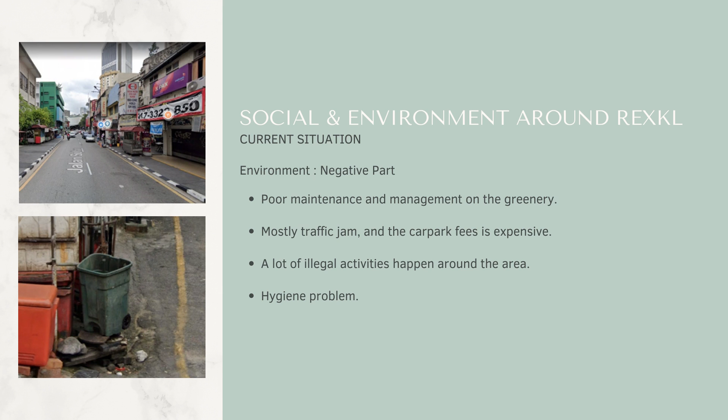Now we'll look at the negative part of the current environment. Around RexKL, the maintenance and management of the greenery is very bad, and the hygiene problem is also very bad. Not only that, the traffic is always jammed, and the car park is very expensive. Other than this, there are a lot of illegal activities happening, for example selling counterfeit goods, vandalism, and others.

So the proposal for the project is to design a pewter museum. The reason behind it is because around the RexKL building, there is a lot of Chinese history related to tin mining. Besides that, there are also some available advantages suitable for a pewter museum. For example, RexKL has a perfect location to attract different kinds of tourists, and around RexKL there are also a lot of cultural or historical buildings that allow tourists to visit.

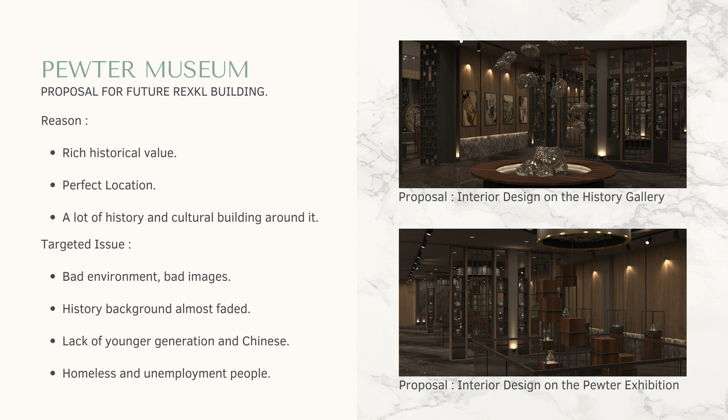Below are the issues that I will be focusing on in this project. So the next part is the chosen client.

The chosen client that I found is Royal Selangor. Royal Selangor is the world's foremost name in quality pewter products and the world's largest pewter factory. It was founded by a Chinese migrant called Yong Koon. Royal Selangor provides a unique hands-on workshop for visitors to experience.

Therefore, this hands-on workshop is a good activity to bring into the pewter museum. Besides that, another reason why I chose Royal Selangor is that it is closely related to pewter and comes with a lot of rich historical value.

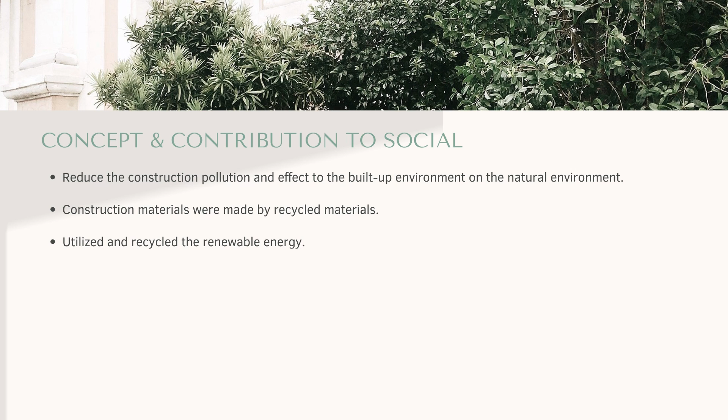It achieved a diamond level under the EEWH, which is the Taiwanese version of LEED. The concept and contribution to society for this building are to reduce construction pollution and its effect on the natural environment. Next, the construction materials were made from recycled material. And the last one is utilizing renewable energy.

Here is the sustainable strategy applied on this building. First is the rainwater recycling system. It collects rainwater and stores it in a water tank, so it can be used for toilet flushing and garden sprinklers.

So it's not only good for the building, it also brings benefits to the surrounding plants and helps them stay hydrated, especially during the summer season. In addition, the stored water can be used to revitalize the ground level water, so it can improve the soil quality and avoid the groundwater drying up.

This rainwater recycling system is not only applicable for commercial or public buildings, it can also apply to residential buildings. So in the long term, it can save a lot of cost.

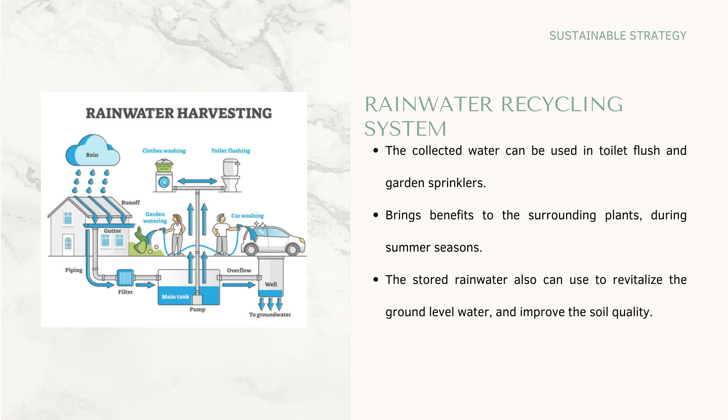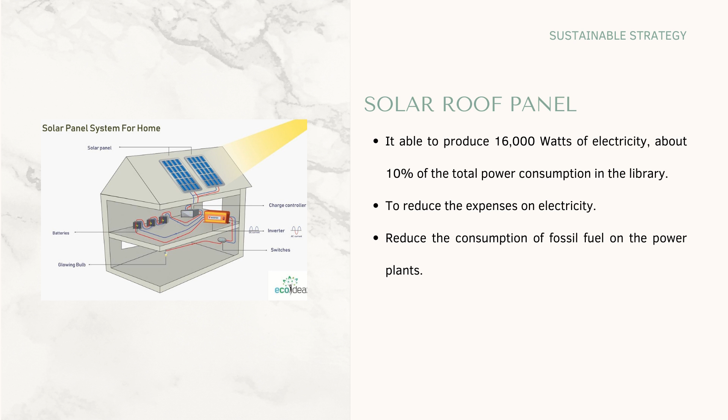So the second sustainable strategy is the solar roof panel. It is able to produce 16,000 watts of electricity, about 10% of the total power consumption of the library. This feature can reduce a lot of electricity cost in the long term, since Taiwan has sufficient sunlight, making the solar roof panel an advantage. Besides that, it also can reduce the consumption of fossil fuel at power plants.

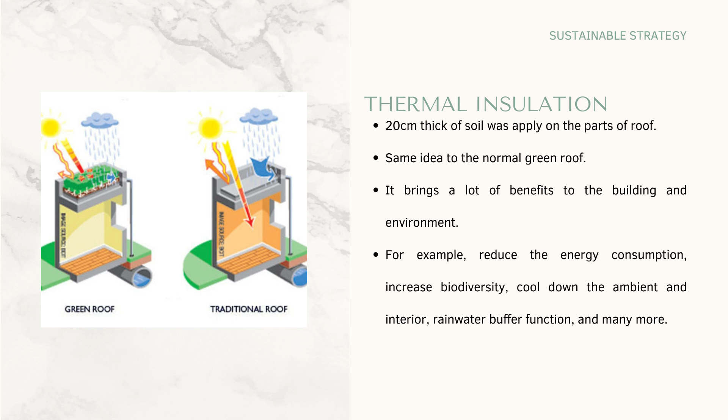Moving on to the third sustainable strategy, thermal insulation. It follows the same idea as a green roof. In this building, they apply a 20 cm thick layer of soil on the roof to cool down the interior temperature.

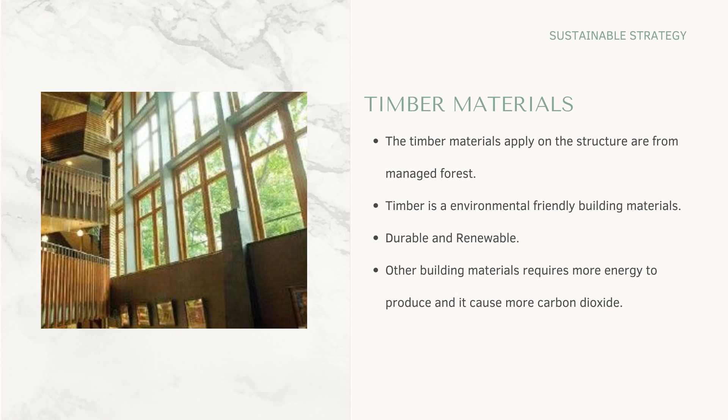The fourth is timber material. The timber used in this library is from managed forests, so it ensures the natural forest is not affected. Besides that, other building materials require more energy to produce and emit more carbon dioxide in the process. So timber material is a good choice for building because it is durable enough and renewable.

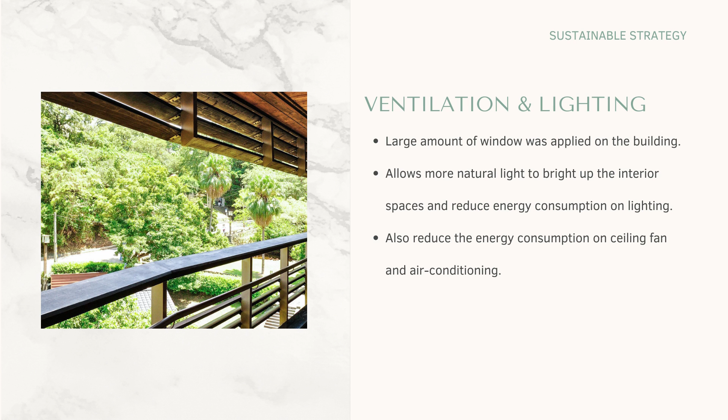So here is the example on the ventilation and lighting. This is the second case study, the Tao Zhu Yin Yuan. It achieved a LEED Gold achievement with a high-rise building.

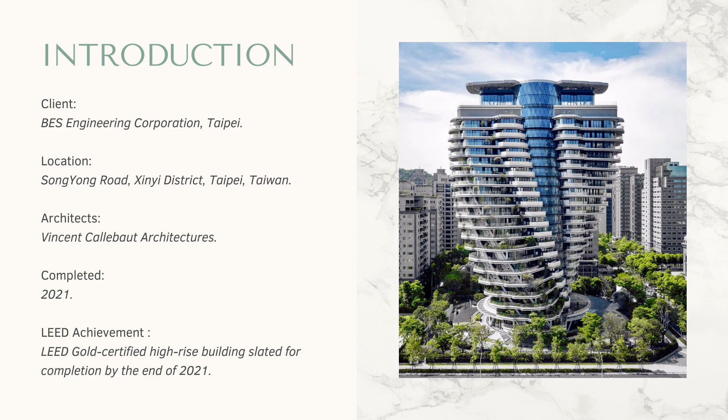The problem statement and concept for this case study: slow down the global warming crisis by creating a carbon absorbing function on the building, solve the air pollution problem in a certain area, and an energy self-sufficient concept. Here is a sustainable strategy applied on this building.

First is the double glass skin facade, to create natural ventilation in order to reduce the usage of air conditioning and interior temperature. On the left here is how the glass skin facade works. The cool air will go into the building and bring the hot air out to the outside from the top.

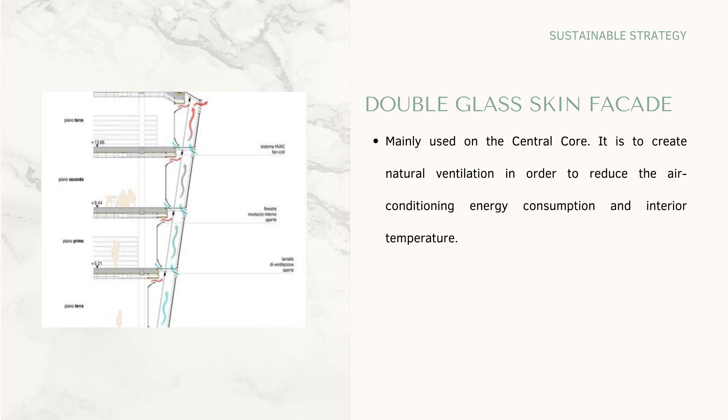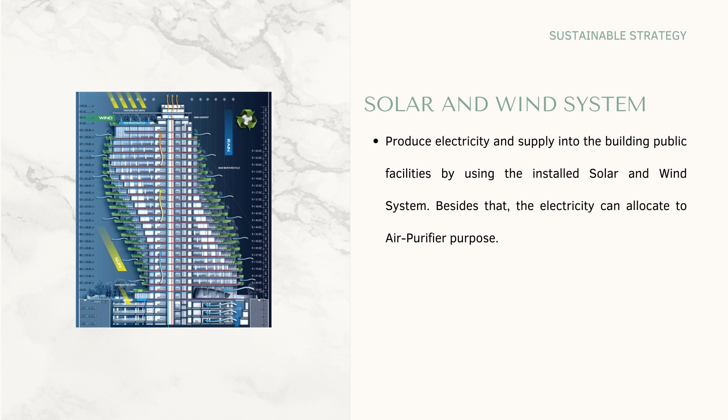Second is the solar and wind system. This can produce electricity by using natural resources and supply it into the building and the public facilities. The third sustainable strategy is the rainwater recycling system, which is the same as the previous one, so I will skip it.

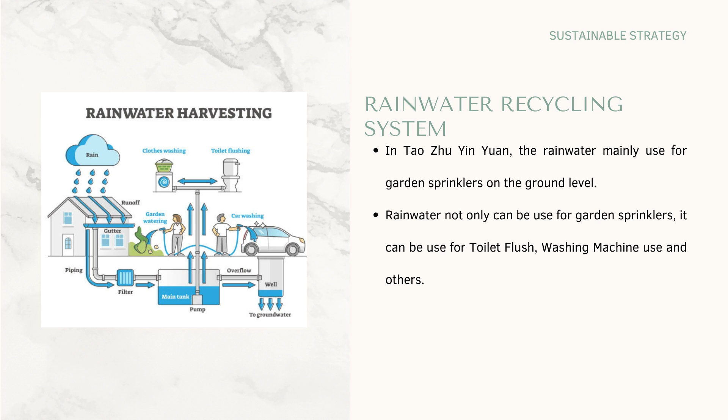The fourth sustainable strategy is about the sustainable materials used in Tao Zhu Yin Yuan. Bamboo material is fast-growing and very strong for interior use. Besides that, aluminium is one of the common materials in construction, and it is one of the most sustainable materials, also lightweight.

The last material is steel. Steel is highly recyclable at the end of the building's life. So these three materials are very good for the building.

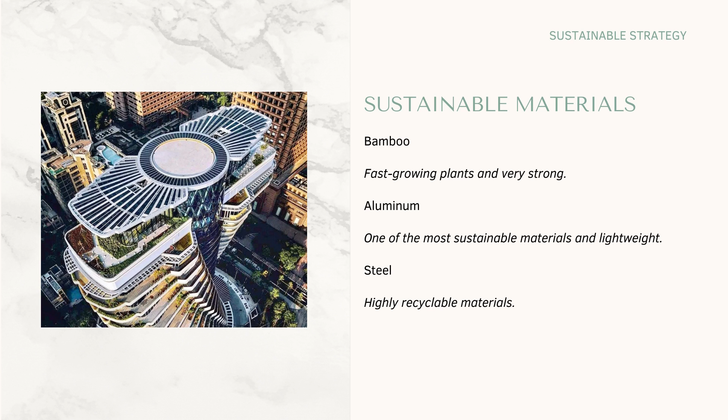Moving on to the last case study, the Capita Green. It's located in Singapore and is one of the tallest skyscrapers there. The issues in this case study are about climate, greenery, and energy efficiency. Here is the sustainable strategy applied on this building.

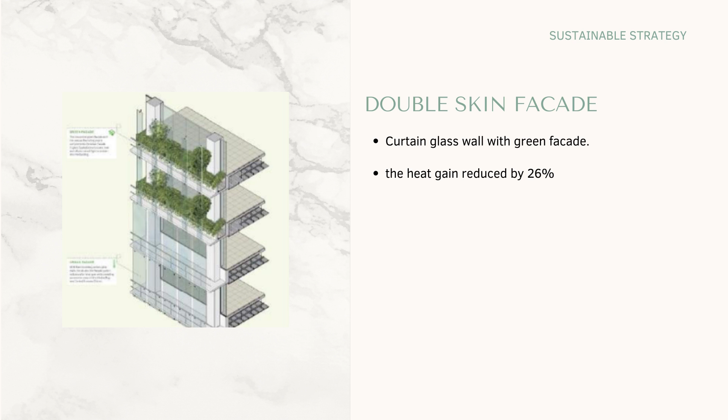First is the double skin facade. It is almost similar to the double glass skin facade, but this one has greenery inside so it can reduce heat gain by around 26%.

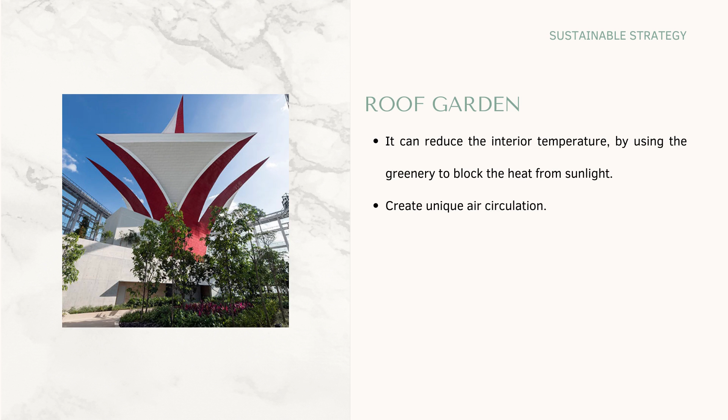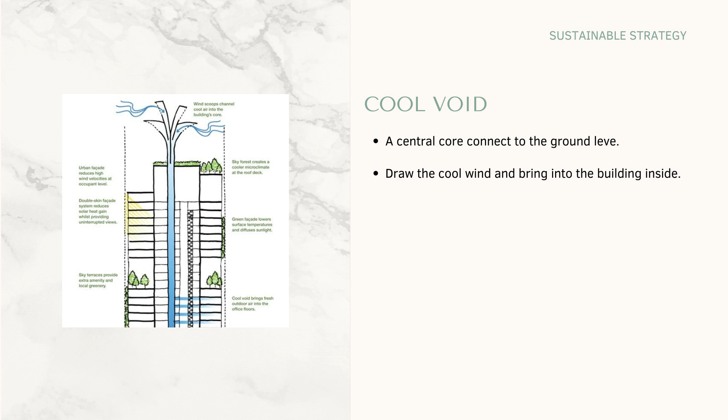The second sustainable strategy is the roof garden, almost the same as a green roof, used to reduce the interior temperature. Here is the cool void. It's placed on the central core, connects to the ground level, and draws the cool wind into the building. From the case studies above, many sustainable strategies have been applied, but only some are very suitable in Malaysia.

Second sustainable strategy is the rainwater recycling system. Malaysia has advantages not only in sunlight but also in rainwater. The average annual rainfall is around 2,400 mm. Besides that, Malaysia is also considered one of the countries with high water consumption, ranging from 209 to 288 liters per day per person.

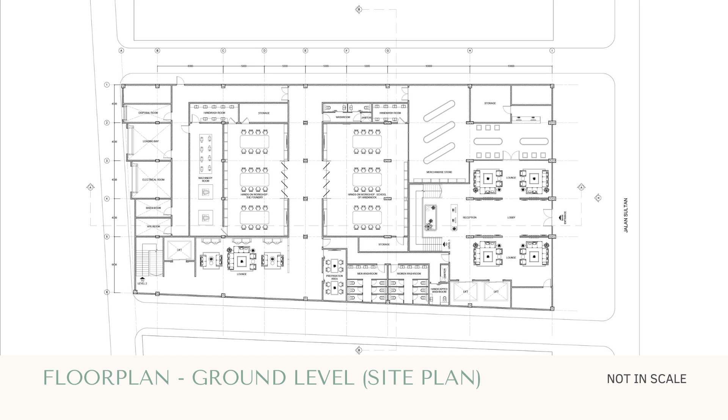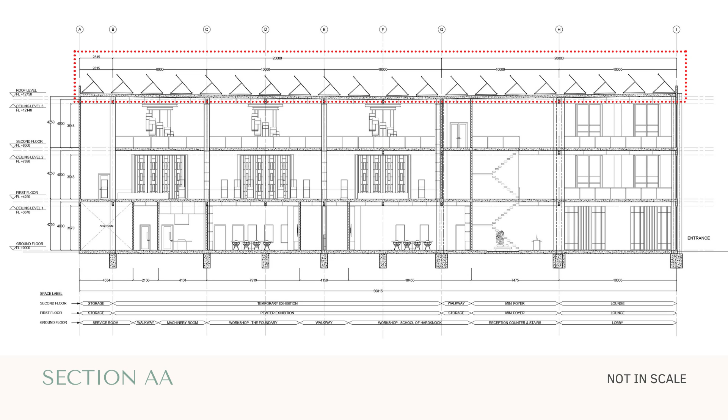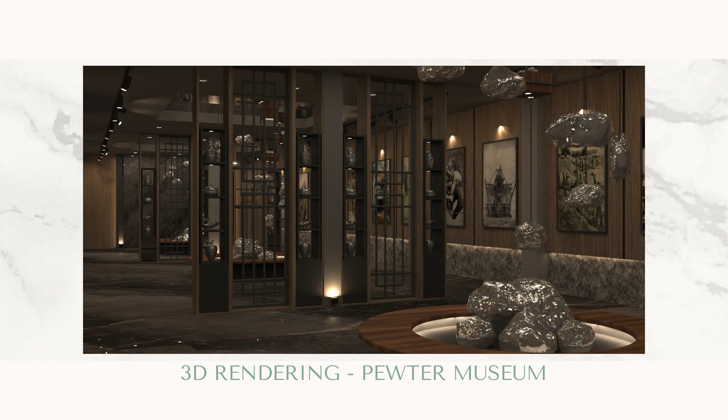Before I end the slide, here is the 3D render for the interior look.